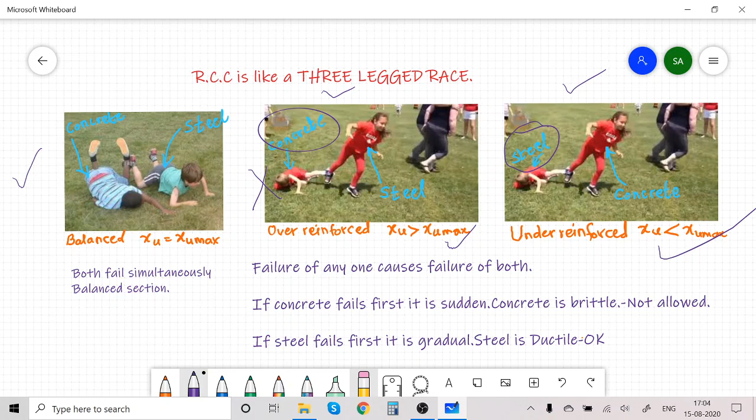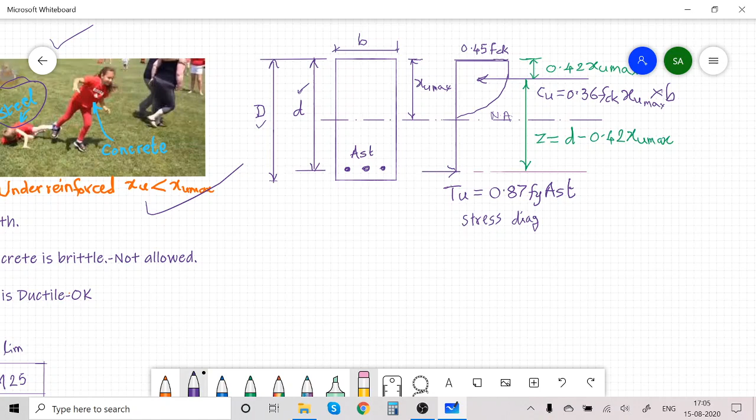Now consider the stress diagram. Here there is a rectangular singly reinforced section, and this is the stress diagram. As usual, B is width of the section, capital D is overall depth, small d is effective depth, and area of steel, that is steel bars, are provided on the tension side. The stress diagram for concrete is rectangular plus parabola.

The total compressive force Cu given by concrete is 0.36 FCK XU max into B. Here, as I am considering it is a balanced section, I will call XU as XU max. So XU max into B is the total compressive force given by concrete. Then TU, the total tensile force given by steel, is 0.87 Fy into AST. These two forces are unlike parallel forces, they form a couple.

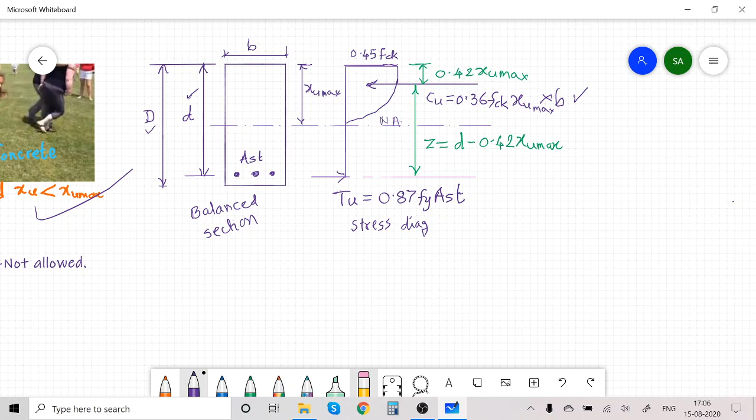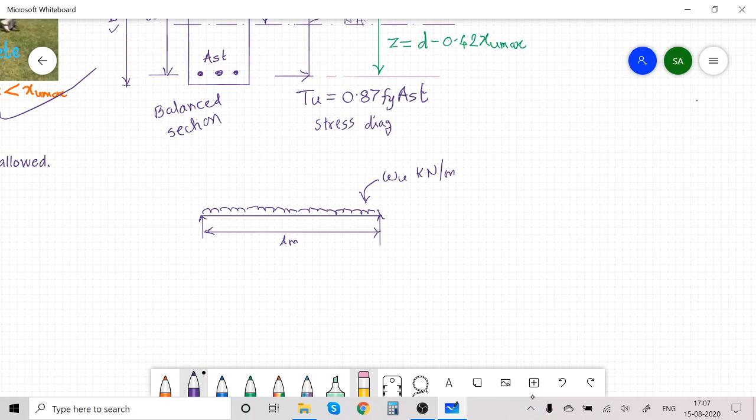Now let us consider a simply supported beam of span L meter. This is a simply supported beam of span L meter, and it is loaded with a factored load, or you can say design load, or ultimate load, UDL, WU kilonewton per meter. WU is the ultimate load or factored load or design load.

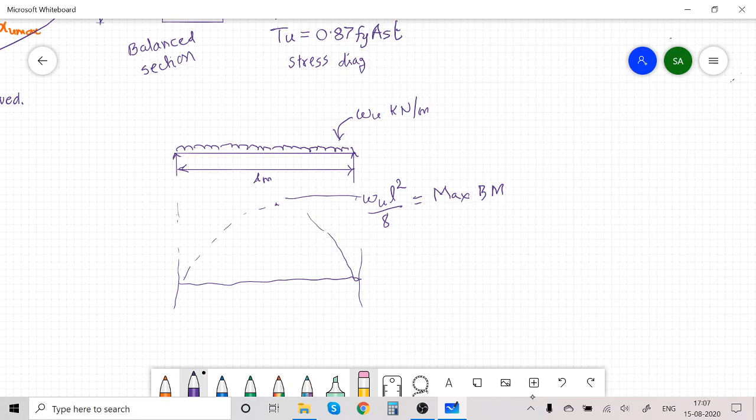Now in this case, the bending moment diagram is a parabola having maximum bending moment at the center, which is equal to WU L square by 8. This is the maximum bending moment due to external loading WU. So we can call this the external bending moment.

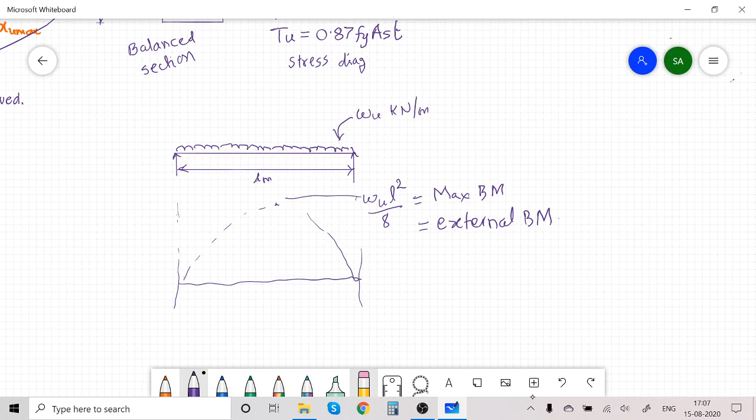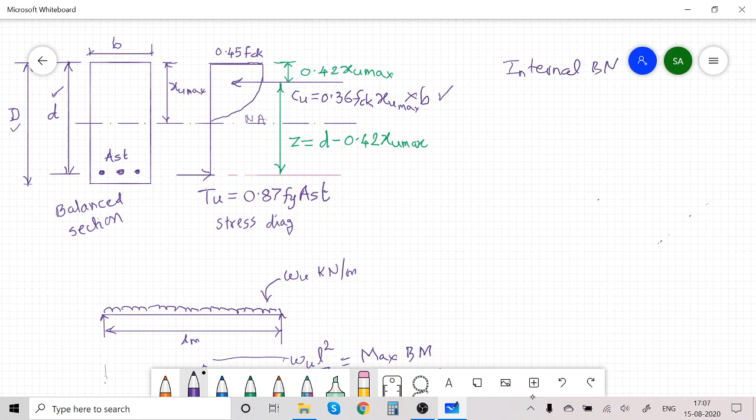Now, to resist this external bending moment, there must be an internal bending moment, which is known as moment of resistance, Mu. So Mu must be equal to Bm max. So action is bending moment maximum, reaction is Mu, that is moment of resistance.

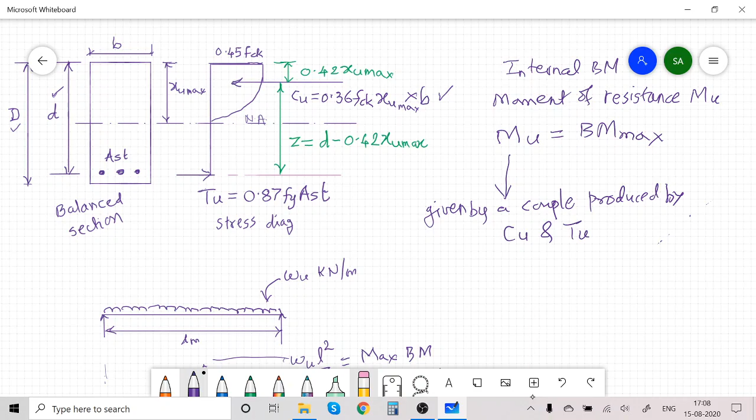This Mu is given by a couple produced by Cu and Tu. So Cu and Tu both are equal, they are equal unlike parallel forces, and the moment of the couple, in this case Mu, is equal to either force Cu into Z, where Z is the lever arm, that is the perpendicular distance between the two forces forming a couple, or it is also equal to Tu into Z.

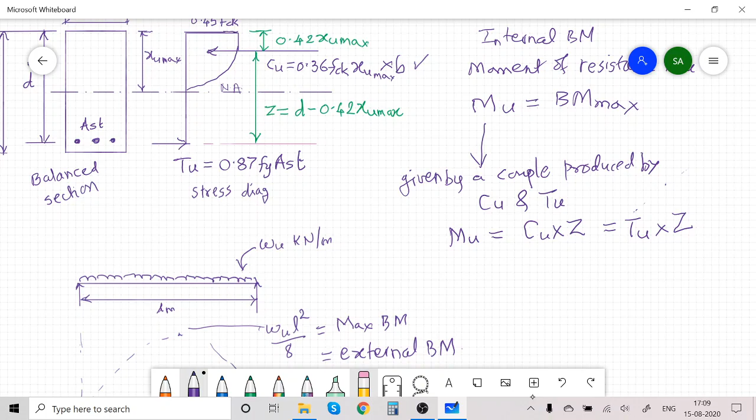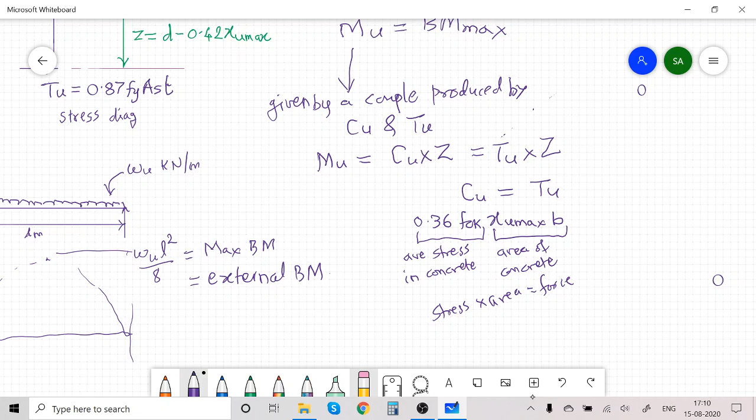Now, as Cu is equal to Tu - I will repeat, Cu is the total compressive force given by concrete, that is 0.36 FCK XU max into B. I am considering the balanced section, so I am writing XU max. Here 0.36 FCK is the average compressive stress in concrete, whereas XU max into B is the area of concrete under compression, that is the area above the neutral axis. So stress into area gives force, this is the compressive force given by concrete. This must be equal to Tu, the tensile force given by steel, which is 0.87 Fy AST.

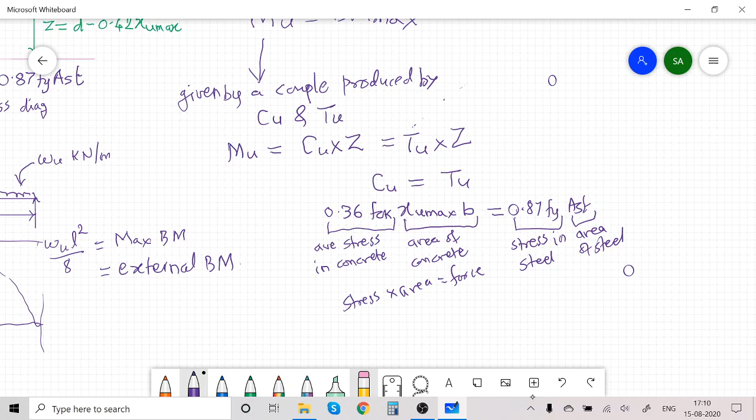Here again 0.87 Fy is stress in steel and AST is area of steel. Again, stress into area gives force. So force in concrete is equal to force in steel.

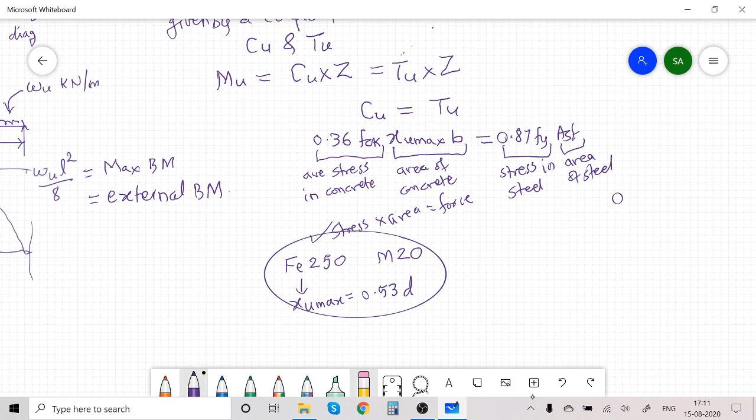Now I will consider the combination of grade of steel Fe250 and grade of concrete M20. For Fe250, we know XU max is equal to 0.53 D. Now I will substitute all these values in this equation. 0.36 FCK is 20 - remember for M20, FCK is 20, and Fy is 250 for Fe250. So 0.36 FCK XU max, that is 0.53 D into B, is equal to 0.87 Fy, that is 250, AST.

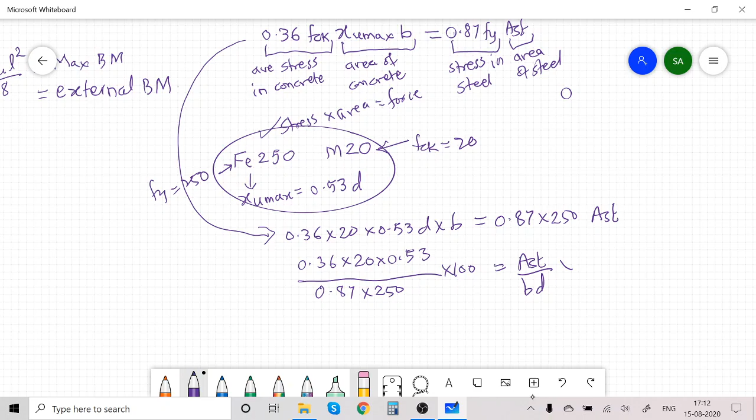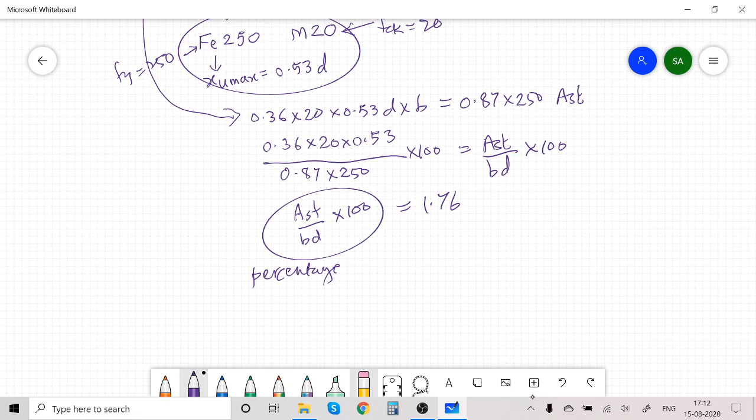Now, 0.36 into 20 into 0.53 divided by 0.87 into 250 is equal to AST upon BD, and for percentage I will multiply both sides by 100. So if you calculate this, AST upon BD into 100 is equal to 1.76. This is the percentage of AST, and as this is for a balanced section, this is PT, percentage of steel maximum, or PT limit.

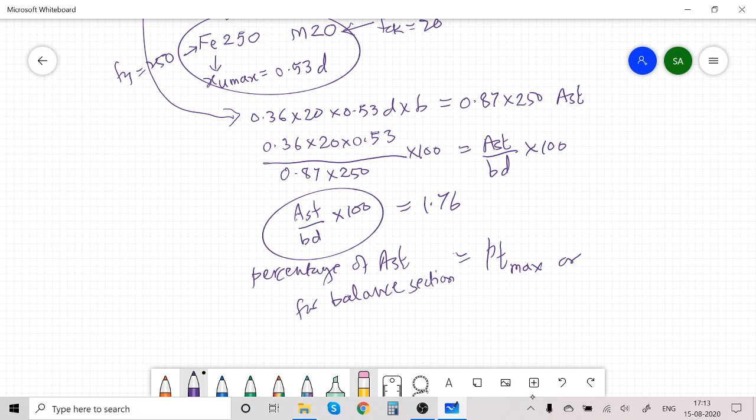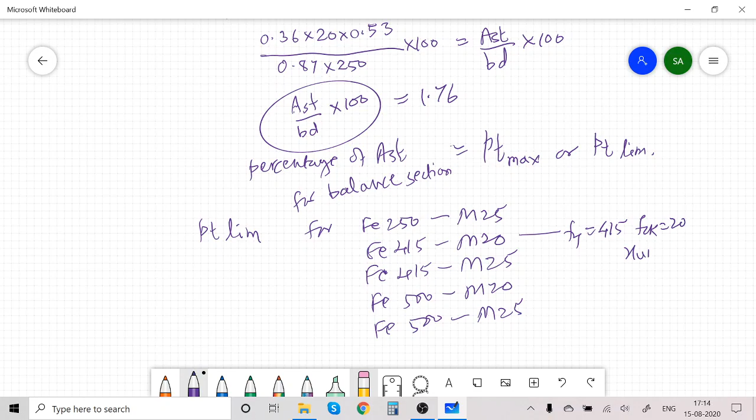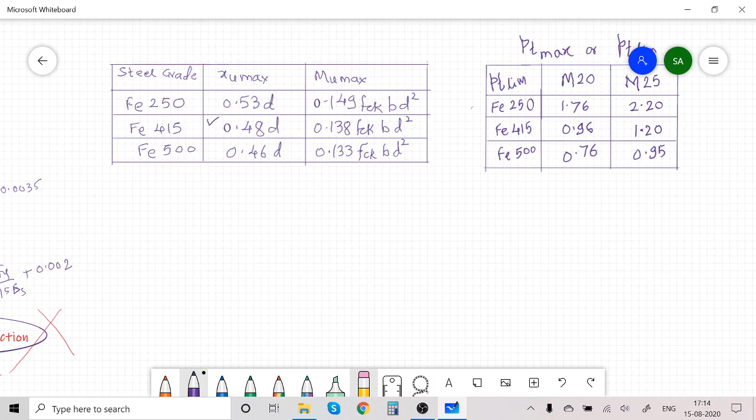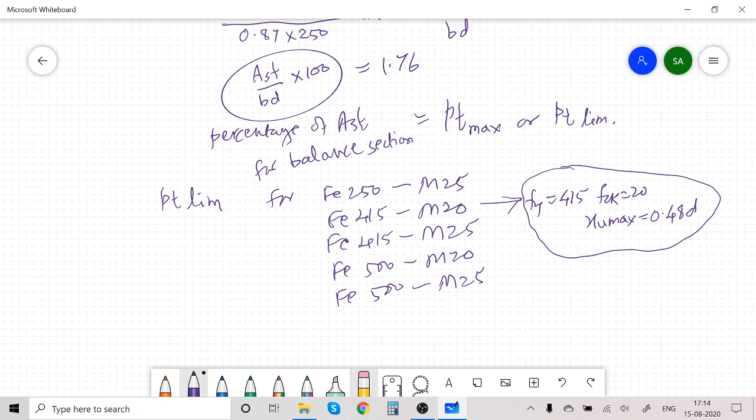Similarly, you can calculate PT limit for combinations Fe250 M25, Fe415 M20, Fe415 M25, Fe500 M20, Fe500 M25, because these are the most common combinations used in various cases. For the Fe415 and M20 combination, Fy is 415, FCK is 20, and XU max, for Fe415, we calculated last time, is 0.48 D. So here you substitute the value of XU max, 0.48 D, for the combination of Fe415 and M20. After substituting these values in the equation Cu equals Tu, you will find the percentage limit for various combinations, and these values are written in this table.

So see that while you are designing, the percentage steel is never greater than 0.96 for the combination Fe415 and M20. Otherwise, it will be an over-reinforced section, which is not allowed by IS 456 2000.